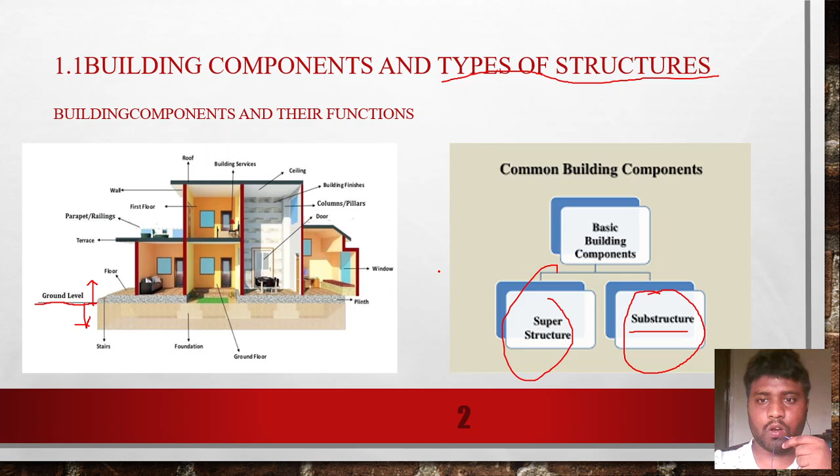So there are some components in substructure and many components in superstructure. In this video lecture we are going to focus on these components of superstructure and substructure. What is substructure? As I already told you, a part of the structure lying below the ground surface, such as foundation of any type, is known as substructure.

So what is the structure which is below the ground level? See, you're seeing a building, you're seeing your house. If you stand outside of your building and look at your house, what can you see? You can see your steps, staircases, doors, windows, walls, roofs. So all these kinds you are able to see. But some structures you cannot see - those structures are foundation and plinth beam. These two will be below the ground surface, so these two components are termed as substructure.

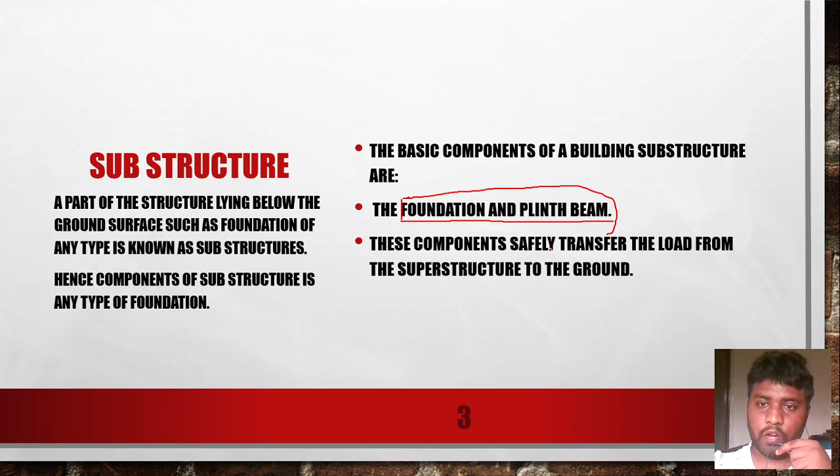So a part of the structure lying below the ground surface, such as foundation of any type, is known as substructure. Hence components of substructure is any type of foundation. So the basic components of building substructure are foundation and plinth beam. These components safely transfer the load from the superstructure to the ground. I will explain how these components safely transfer the load from superstructure to the ground surface.

I will explain the next slides.

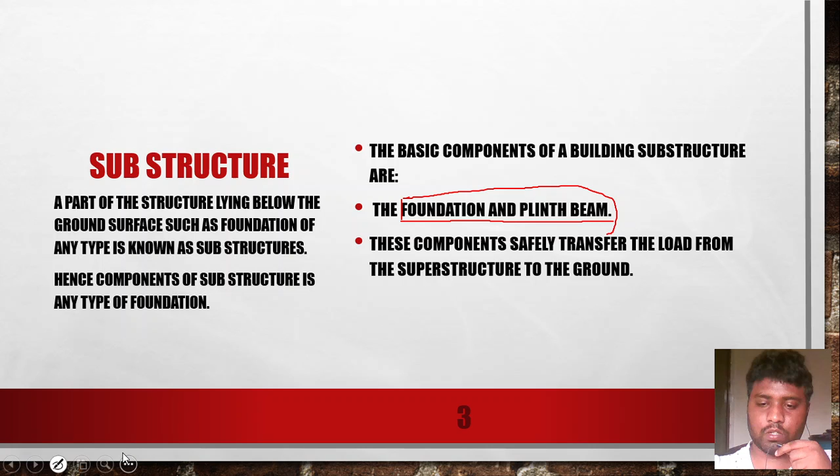So what is foundation? Foundation is the lowermost structure in any building. The foundation will be the lowermost structure in a building, and it will transfer the load from superstructure to the soil.

So the work of the foundation is to transfer the load from the superstructure to the soil. This is the work of foundation.

So some of the functions of the foundations - there are 6 functions, mentioned in this slideshow. One is reduction of load intensity.

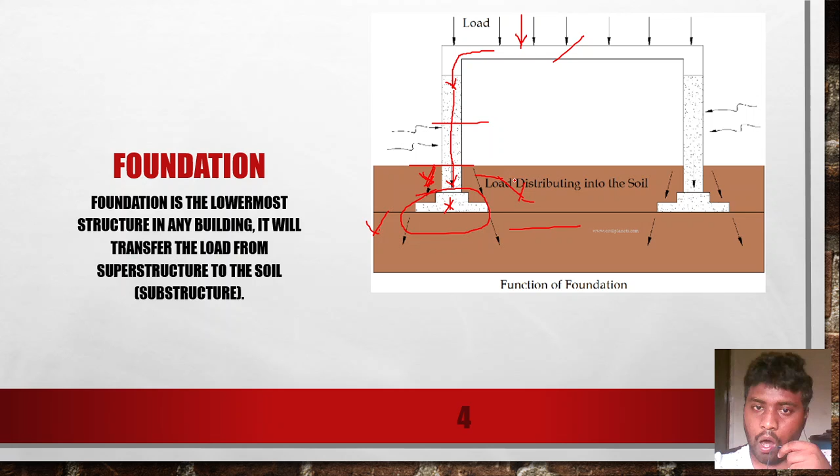What is reduction of load intensity? Foundations distribute the load of superstructure to a larger area. As you see in this picture, it distributes the load from the superstructure to the larger area of the soil. So in order it distributes to a larger area, the total intensity of the load.

What is intensity? Intensity is nothing but the strength or power. Strength of the load doesn't exceed the safe bearing capacity of the soil.

Safe bearing capacity - what is safe bearing capacity? The maximum capacity of the soil to bear the maximum stress or load. What is stress? Stress is nothing but the load applied to a given area.

So the type of soil - we have many types of soil: dense soil, undensed soil. These are the two important basic types of soil. In the dense soil we have major types, and in undensed soil we have major types. So the maximum bearing capacity of the soil to bear the load, that is to bear the load safely.

If the load exceeds the safe bearing capacity of the soil, what will happen? Immediately there will be a movement of soil, or soil will not be able to bear the foundation load, and it will deform under the foundation. So there will be displacement of foundation.

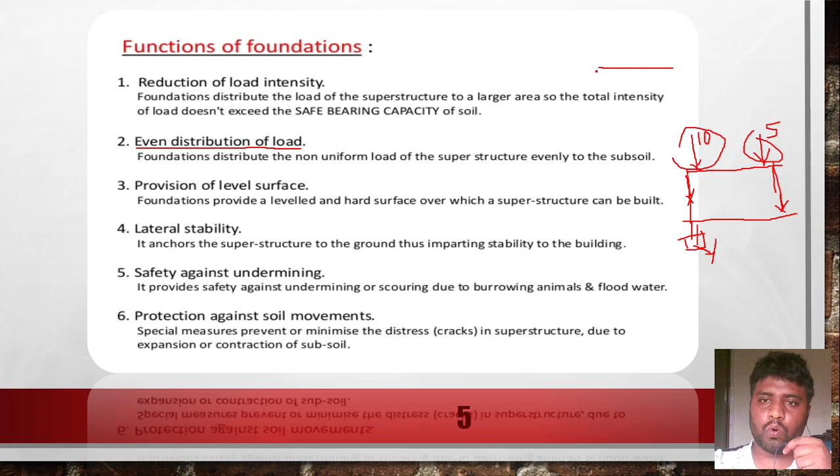Third one is provision of level surface. Foundation provides a leveled and hard surface over which a superstructure can be built, so that we can raise walls and build our roofs. So it gives a level surface.

Lateral stability - stability means what? The capacity of being stable firmly, to stand firmly. So it anchors stability to the superstructure. This foundation gives stability, strength in order to stand with strength. So it gives strength to the superstructure, to the ground, thus imparting stability to the building.

This is very important - thus imparting the stability to the building. So this is what we are going to see in this thing.

Next one is safety against undermining. It provides safety against undermining or scouring due to burrowing animals and floodwater. What is undermining? Sometimes the soil around the foundation, surrounding the foundation - this is the foundation.

The soil surrounding the foundation will have a gap between the soil and the foundation due to water which saturates the soil. The soil becomes loose and gets washed away from the foundation. This is called undermining or scouring, which is nothing but water logged and the surrounding soil getting displaced from the foundation.

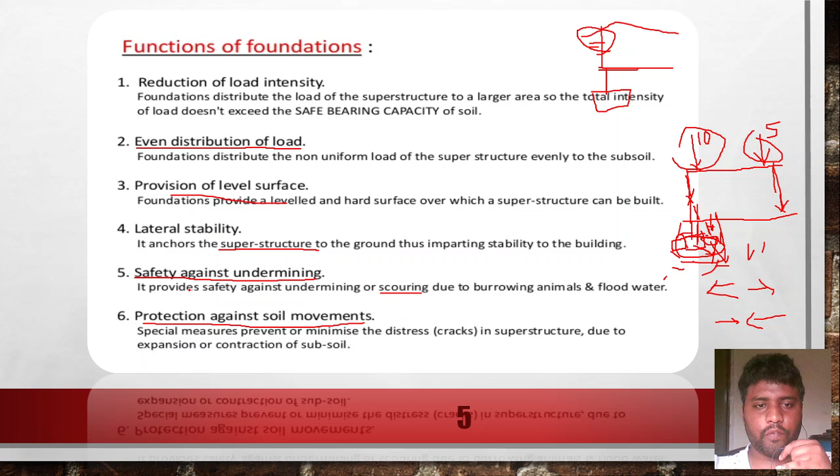The plinth beam is basically the transition component of the structure where the superstructure meets the substructure. Transition component means this component transmits the load from the superstructure to the structure below, which is the foundation in the substructure. So it's a transiting component that transmits the load from superstructure to substructure.

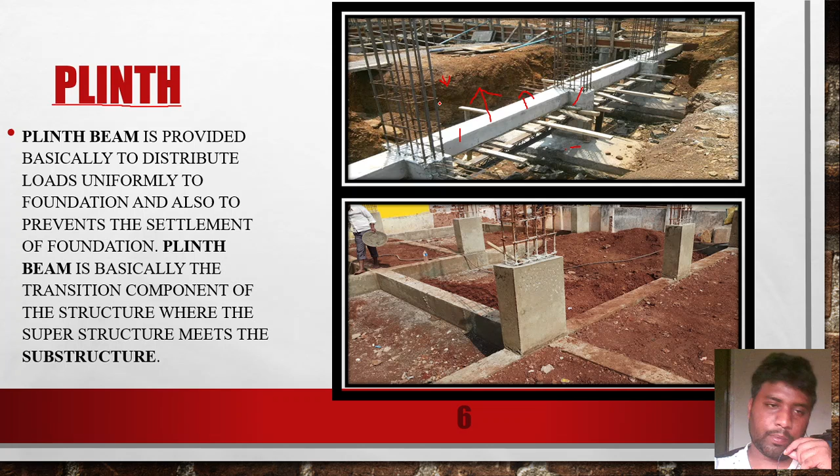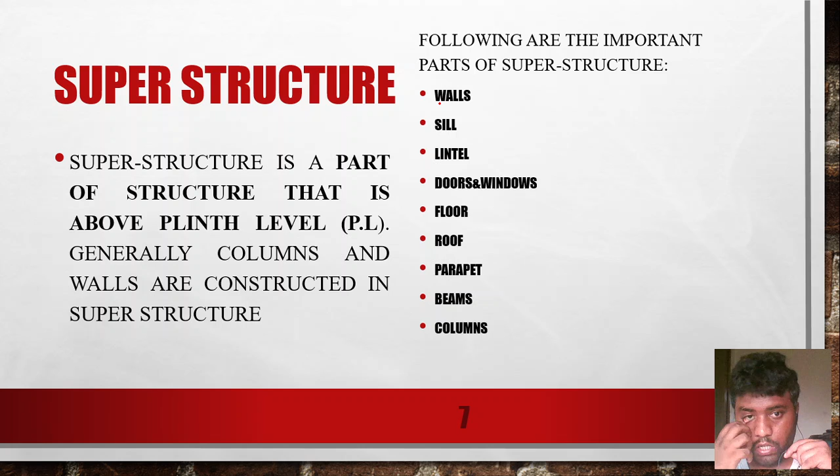Now we have seen what substructure is — there are two components in substructure: foundation and plinth. Next, superstructure. Superstructure is the part of the structure that is above plinth level, which is above ground. The correct sentence is: the structure which is above the plinth level.

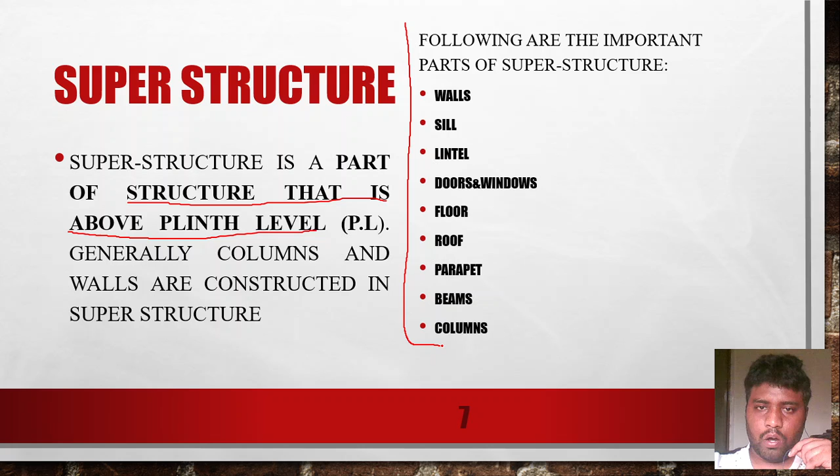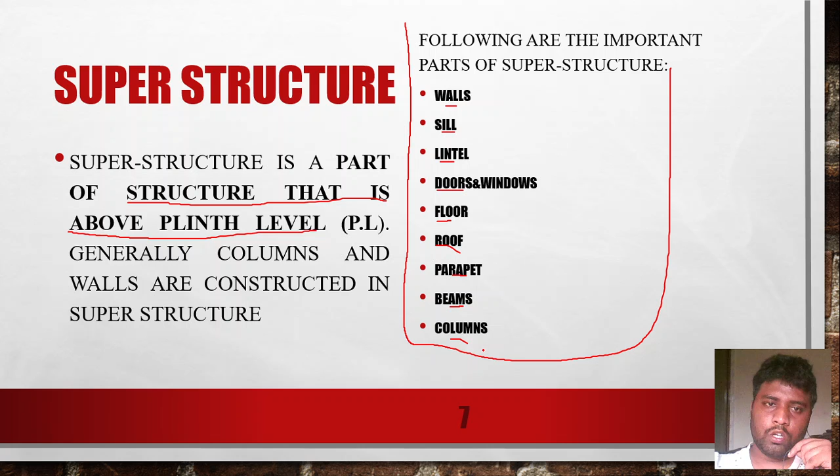Generally, columns and walls are constructed in the superstructure. These are some of the components of superstructure: walls, sill, lintel, doors and windows, floors, roof, parapet wall, beams, and columns. We will see all these in the coming slides.

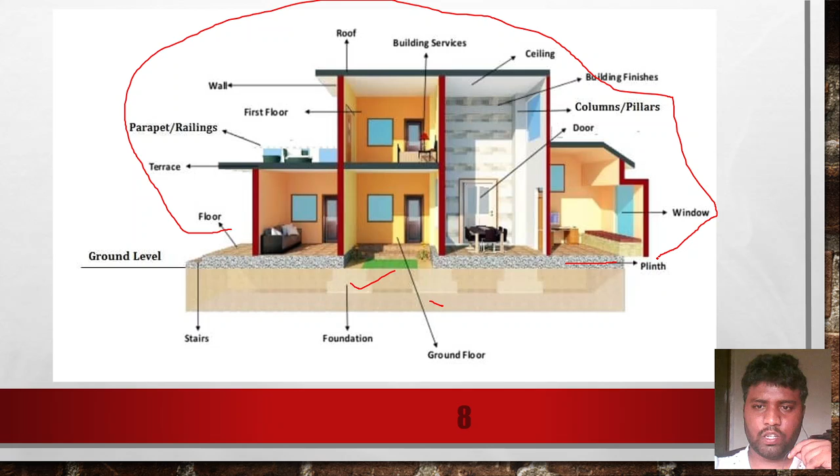Next we are going to see about the superstructure. It's very simple — I will explain within 5 minutes so you can understand all the components of superstructure.

Next is wall. A wall is a structure that defines an area, carries a load, and provides security. Without a wall, animals or strangers may enter into a house or building. So it provides shelter from different kinds of weather — cold, rainy seasons, sunlight — and also soundproofing, giving privacy. So this is the main purpose of a wall, along with decorative purposes.

There are many kinds of walls: load bearing walls and non-load bearing walls. Load bearing walls are the walls which carry loads, and from the wall the load will transfer to the foundation.

Non load bearing walls are walls which do not carry the load, but instead the structure like columns and beams will carry the loads and transfer it to the foundations. Nowadays we are going for non load bearing walls.

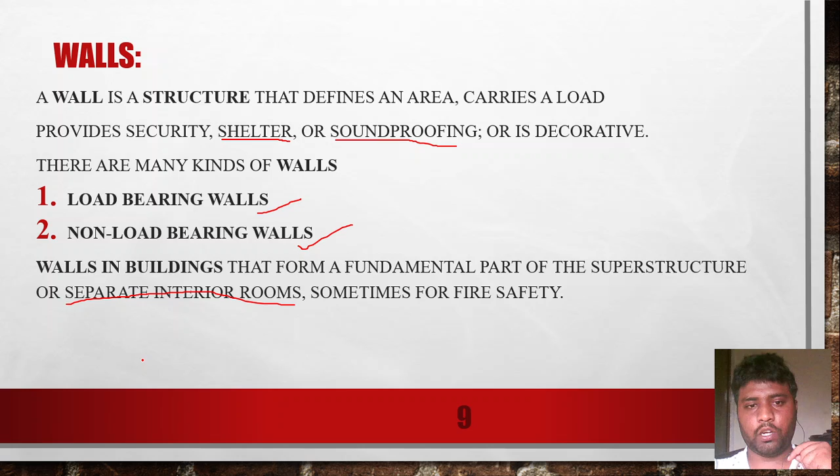Walls in buildings form a fundamental part of the superstructure or separate interior rooms, sometimes for fire safety. So if you want to separate a bigger room into smaller portions, you can use a wall to separate interior rooms.

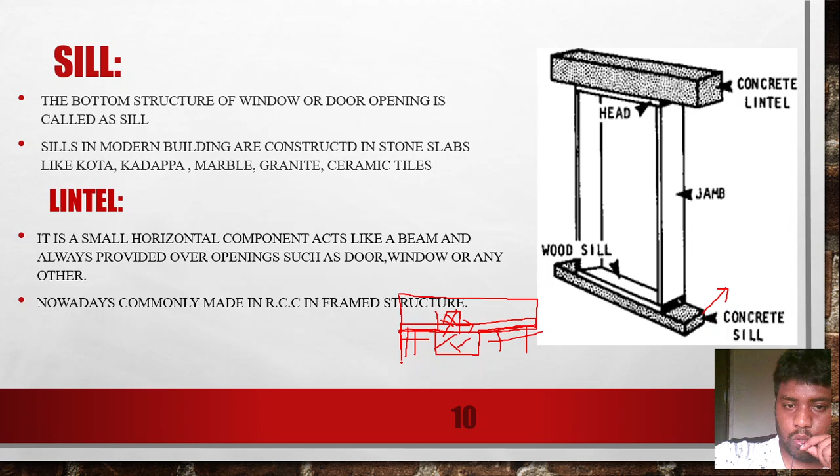So what they do is construct a beam over the window, and this beam is connected to the side columns. Whatever load is above the window goes to the beam, and the beam transfers it to the column, so no load transfers to the window and there are no damages to it.

For this purpose, a lintel is always provided over openings such as doors, windows, or other things - a small horizontal beam component over the opening. Nowadays it is commonly made in RCC in framed structures.

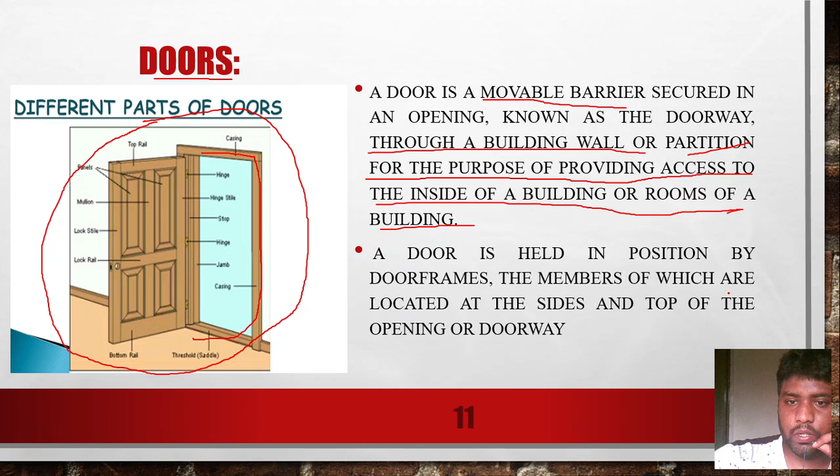A door is held in position by door frames. How is this door held in position? Using door frames - this is a frame. Using this door frame, the members of which are located at the sides and top of the opening or doorway. So this is all about doors.

Next is windows. What is the definition of windows?

Window is a vented barrier. It's used for ventilation purposes, in order for light to come inside the building, in order for air to come inside the building. For that purpose only we are using windows.

So for that purpose we are providing a window, so it will get all the light and air to come inside. That is, to admit the light and air into the structure. A vented barrier provided in a wall opening, also to give an outside view so you can see what is happening outside. Windows also increase the beauty appearance of a building.

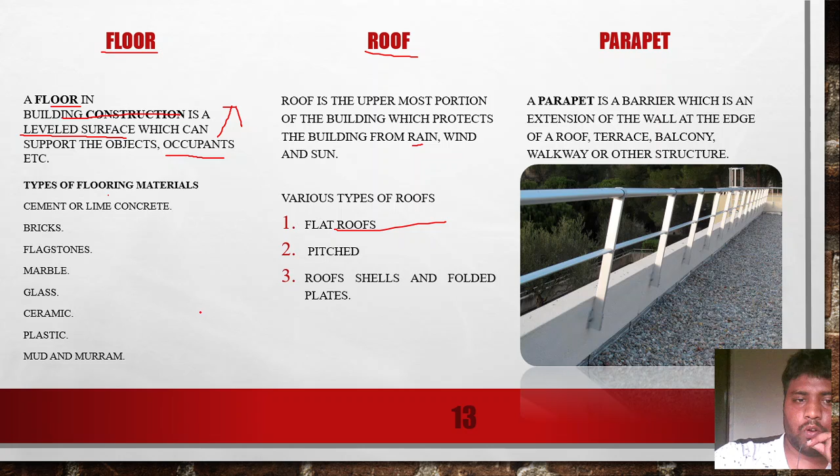Various types of roofs are flat roofs - roofs which are flat - pitched roofs, these kinds of roofs are pitched roofs, roof shells, and folded plates.

Next, parapet walls. Why are we providing parapet walls? In a flat roof, if you don't provide parapet walls, what will happen? If we are accessing the open place, it is possible for us to fall off the building, out of the building, from the top.

So parapet is also a barrier which is an extension of the wall to the edge of a roof. It is provided at the edge of the roof for walkway purposes like balcony, terrace, and other structures. This is the purpose of parapet walls.

Next component is column. It is a vertical member - the vertical member of a frame structure is known as column. It is made up of reinforced cement and concrete.

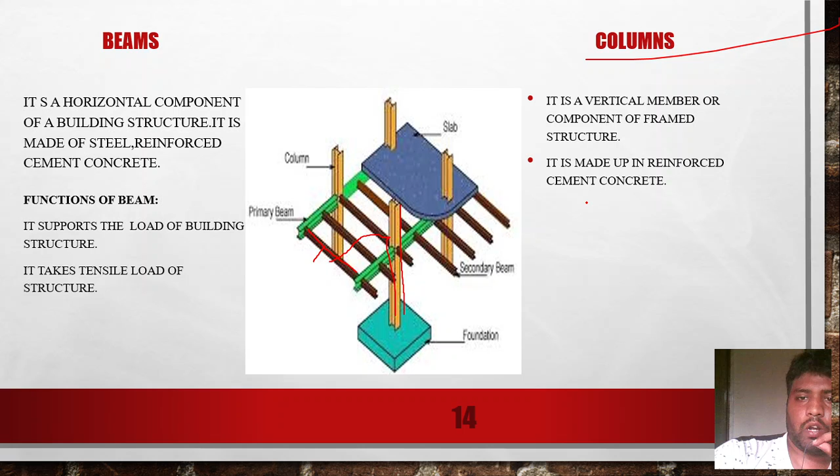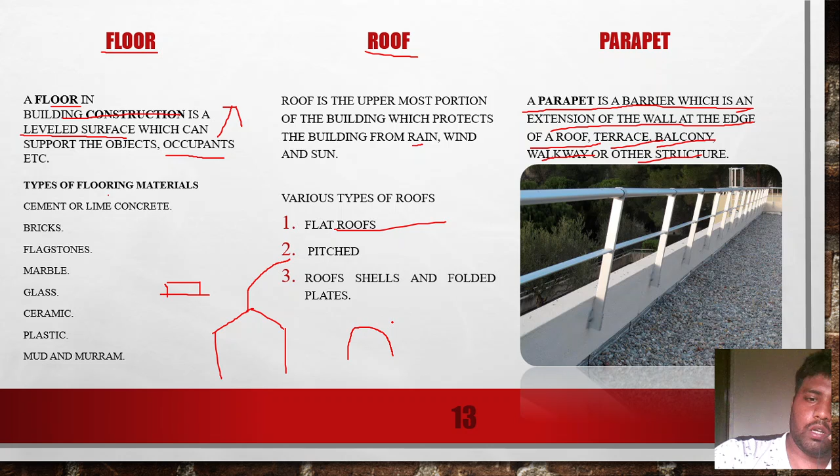All these components in a superstructure and substructure we are going to study in detail in the coming video lectures on structures. In this video, I have explained briefly what are the components, what it's all about. Many of us, as civil engineers, don't know and aren't able to tell what the component is.

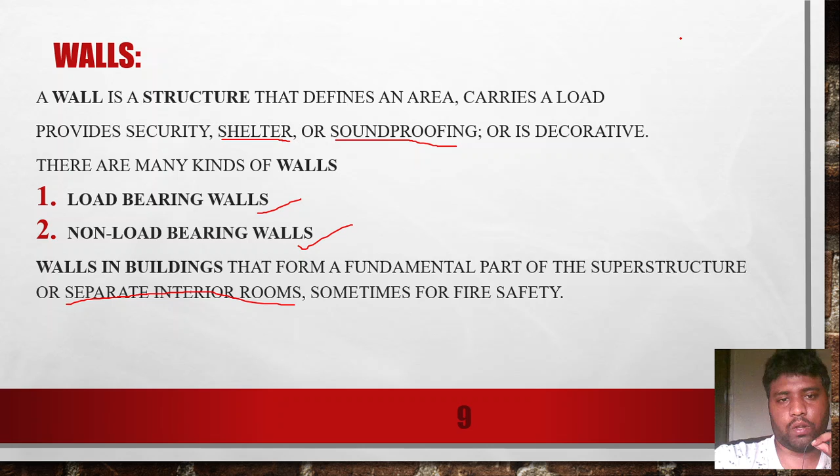If someone asks what is sill, what is the purpose of sill, or what is wall - basic definitions we couldn't answer. So don't worry about it. If we look into these kinds of videos, we can understand it very quickly.

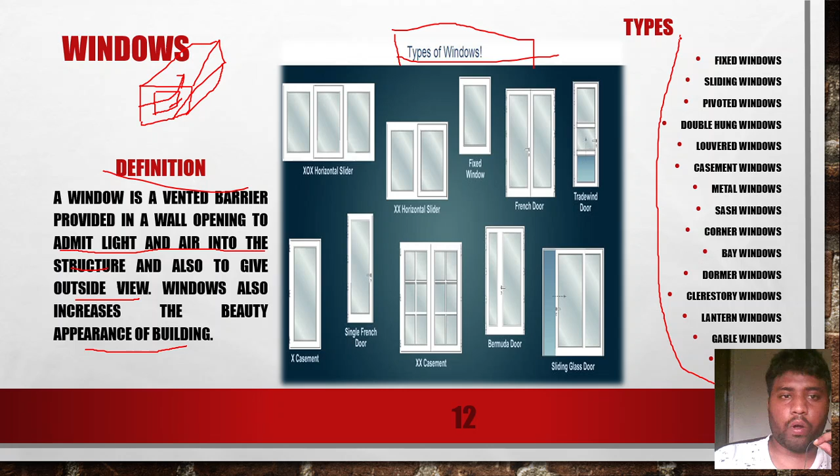So from this, I'd like to close this video. In the upcoming days, as I already told you, we are going to study briefly what is building construction and what things come under building construction.